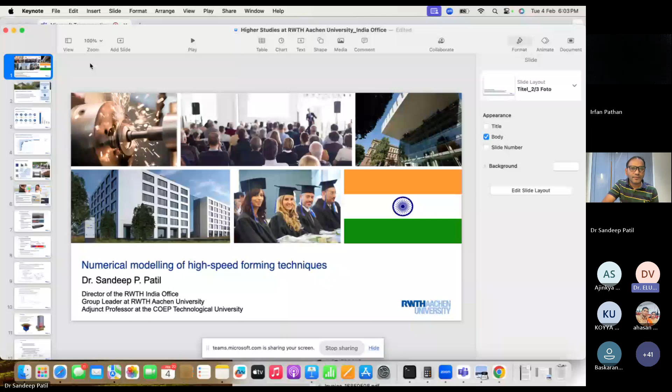First of all, thank you to Aditya University, with whom we already have collaboration, and we have been working together with student exchange and other possibilities, starting with student exchange to research activities and other planned activities between these two institutions. Before I go into the topic of numerical modeling of high-speed forming techniques, I would like to go into the details of the university first, talk about RWTH Aachen University, and then go into the main topic of today's session.

RWTH Aachen University, you must be knowing it, if you're in manufacturing and mechanical, then I think it's one of the best in the whole world. If you look at the QS Ranking 2025, the overall ranking of this university is 99, so it's in the top 100. However, if you look subject-wise, mechanical, aerospace, production and manufacturing, it's ranking 19th in the whole world according to the QS World Ranking 2025.

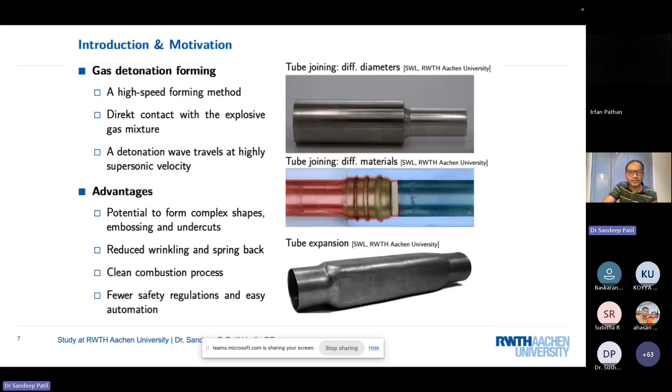So here you can see the ignition of H2 and O2 at one end. The ignition is happening at the left side of the tube, which is the ignition force created due to the ignition of H2 and O2.

Then afterwards, the detonation wave started because of the ignition, and this pressure wave propagation is happening. You can see the flame front, which is compressing the heated gas, and that's creating the pressure waves. So you can see in the right side picture how the pressure waves are created.

On that end, the right hand side end, there will be a sample, a blank, which you would like to deform into a different shape according to how you put the die at the end. There's one more thing, a reflected wave, which comes again from the reflection of the sample after the impact, and then it's getting reflected and hitting back. So this is what you will see with one pressure wave diagram.

So again, applications of this forming method can be into computer controlled detonation spraying process, tube joining, cup forming, pipe with a variable cross section, which you have seen already in the previous slide picture.

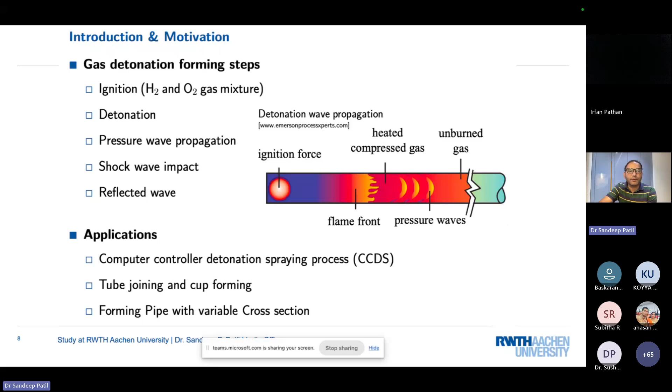Okay, so in Aachen, what we did was to have the experiment on one blank. Initially, we had this DC04 steel blank, and we put it into the grooves. So I'll just show you here.

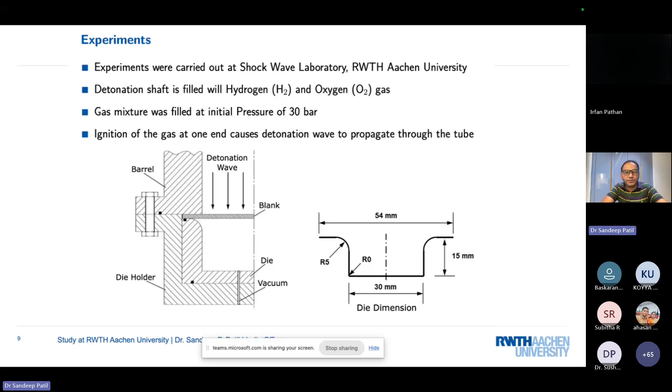So we just put it into the tube and the die. We put this blank into the groove, and then somewhere here there was a pressure created with the H2 and O2, and detonation happened, ignition happened. Then it created a lot of pressure.

Generally there is always a diaphragm, which is a cut section of the one standard blank. In order to have high pressure on the detonation side, once that pressure is created which can break the diaphragm, it means the diaphragm is providing the time to create that amount of pressure. Once that certain pressure is reached, it breaks the diaphragm, and the detonation wave travels and hits the blank. Then, depending upon the pressure you are applying, it takes shape.

For our experiment, we wanted to have a cup formation. So what we did was fill the gases of H2 and O2 with an initial pressure of 30 bar, and we ignite the gases at one end to create these detonation waves.

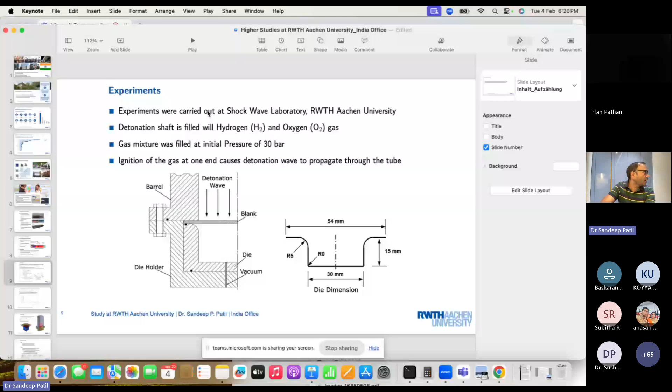Here, the pressure behind the detonation wave exceeds 20 times the initial pressure. If you look at the initial pressure, it's 30 bar, but the peak pressure of this experiment goes up to 150 bar. The measurements in this experiment were made with a piezoelectric sensor.

As I said, we avoid the negative pressure by using the vacuum tube, and sometimes we put a moist filter paper on the blank on the gas heating side, so that there is no overheating of the blank at the surface.

If you look at the pressure in a very short time, you can see the peak pressure of 150 bar, and then afterwards it goes back to the lower side. It's because of the reflection wave - again you get a little more pressure, then it goes down again, up and down. So this is the pressure wave we have observed.

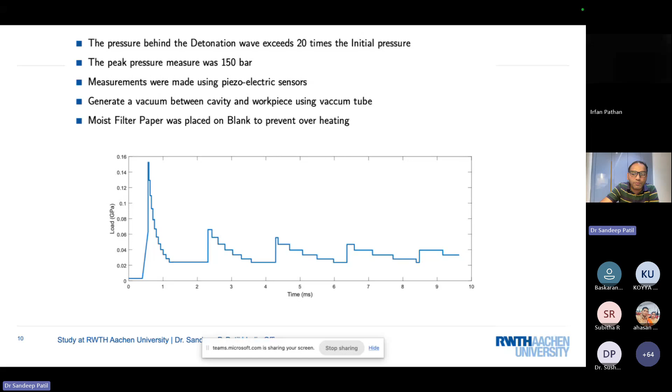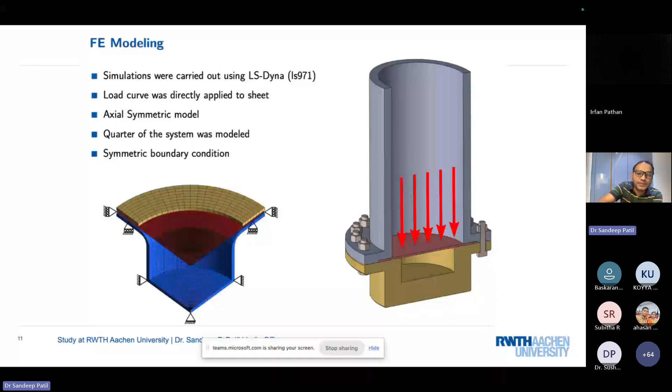If you look at the modeling, or finite element simulation, we used LS-DYNA and Hypermesh to create the model. In Hypermesh we created the model, and you can see here this is the model we created with CAD. We meshed it using Hypermesh, and we used different types of models.

We used one 2D model, which is just like one blank and the shape of the die. It's a 2D model, but it wasn't showing much due to lateral pressures and other things, and we wanted to also study damage. So we didn't consider that as the main model for the study. Instead, what we did was consider a quarter of the system, model it, and put axisymmetric boundary conditions.

So you can see here, this is the die, this is the die holder, and this is the sample blank, which is the red color. So when we applied the pressure on the portion which is open to the gas detonation, this is what we did.

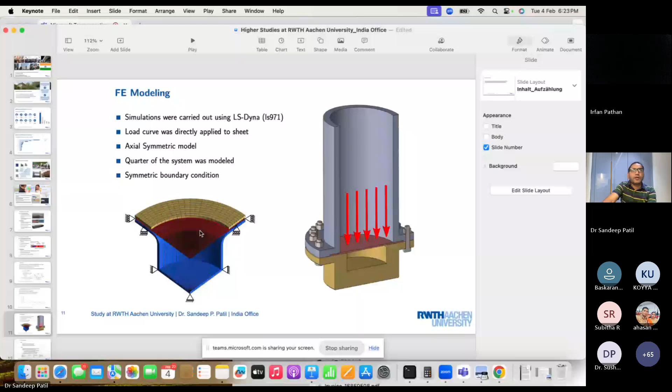It's very standard practice to use the die with solid rigid elements, called MAT20, because it's not the active part in the simulation. We don't want it to have any other material which adds calculation and too much simulation time. So we use rigid elements with high stiffness - it's not the active part, so we are not interested in the die, we just made it a solid rigid element.

The blank, which is our interest, uses Belytschko-Tsay shell element with 1 millimeter thickness. We tried other shell elements also, but as you can read in details, this Belytschko-Tsay element type is perfectly suitable for our high-speed method. Simulations were done using the material models MAT03, MAT24, Johnson Cook material model.

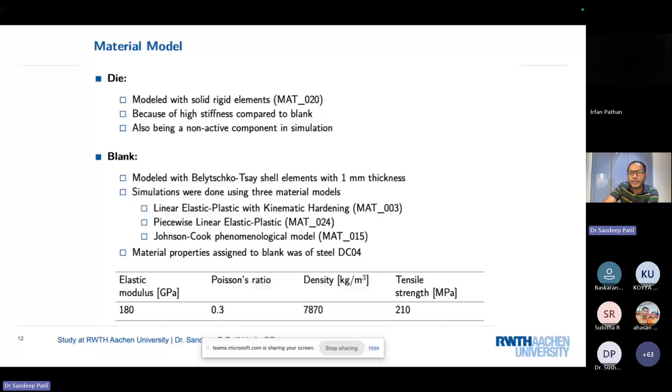So if you look at the kinematic hardening, which is a very simple model, I will explain in a minute. Material properties we assigned to the blank were steel DC04, and the DC04 mechanical properties—elastic modulus, Poisson ratio, density, and tensile strength—are tabulated in the table.

So the first one we used is kinematic hardening, which is very simple. A straight line going up, with kinematic piecewise linear elastic plastic behavior. Many of you must have used this, which always puts the stress strain curve into the software, and that's how it makes its behavior.

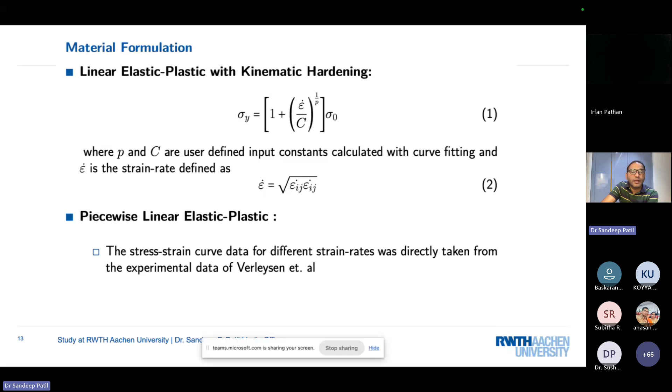Different strain rates were considered directly from the experimental data of Professor Verleysen from Belgium. She carried out many experiments with different strain rates, and we used that directly for our simulations. The last model we used was the Johnson Cook phenomenological model.

This is very interesting, so just not to go into too much detail, because I can explain how we get the parameters of the Johnson Cook model—and in our paper you can find this material model explained in more detail.

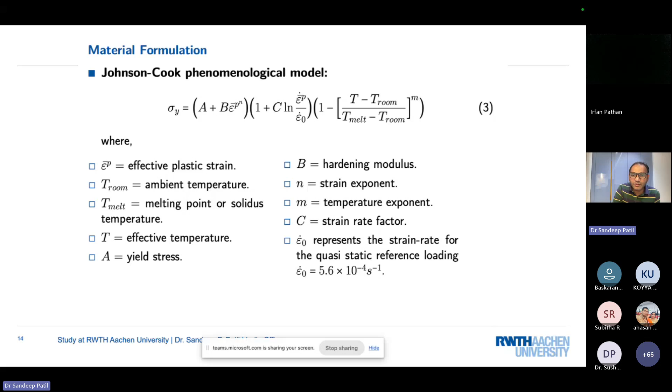So the parameters A, B, and N: A, B, and N are the yield stress, hardening modulus, and C is the strain rate factor, and N is the strain exponent. These parameters are determined using the static tensile strain test, so it's not rate dependent, but the other parameters like C and m are.

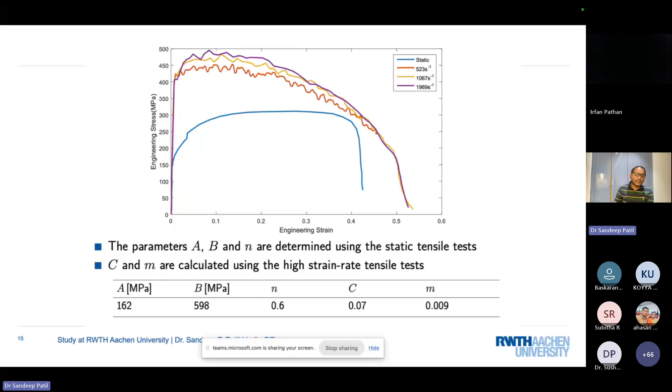If you look at the strain rate factor and the temperature exponent, if temperature plays a role, then it is calculated using the high strain rate tensile tests. So some of the parameters are calculated with the static strain, and some with the high strain rate. So what was the gap in the research?

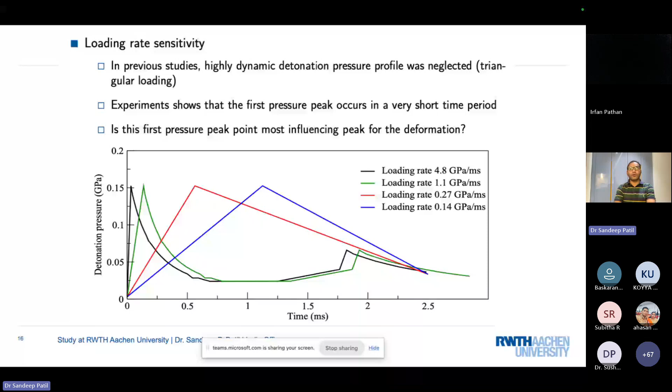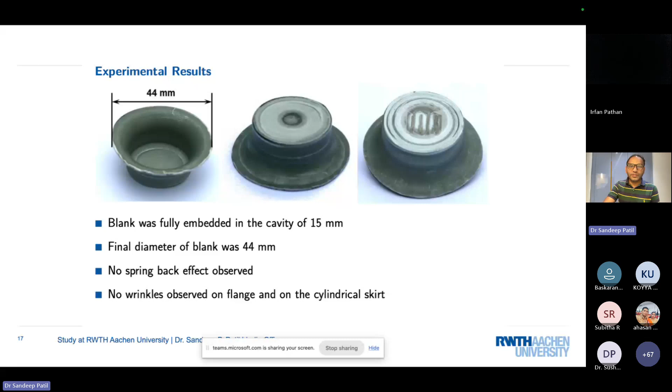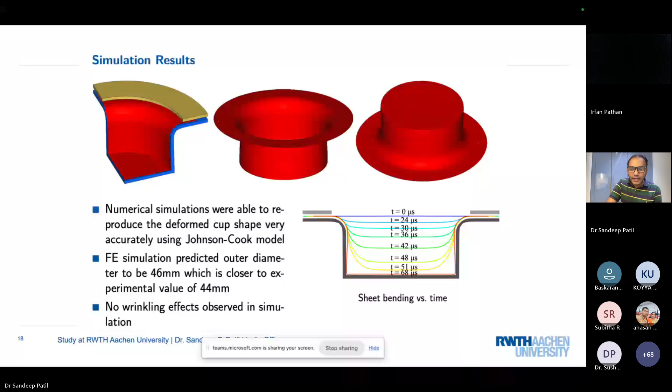Now with the simulation, we found that the outer diameter wasn't exactly 44 but was 46, which was pretty close. There were no wrinkles observed, and with respect to time, it was going nicely into the die, and at the end you can see it going sharply into the corners, making exactly the shape we observed experimentally.

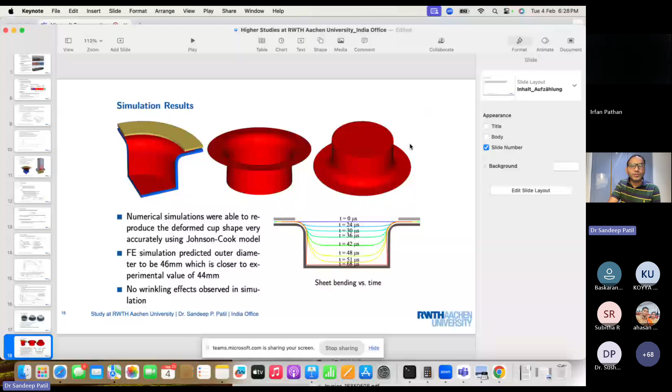So if you see here, exactly the sharp corners that we observe here in the simulation—so that was very interesting for us.

An important parameter we wanted to study, which many people have also studied, is the thickness distribution from the exterior edge to the center of the blank. What we did was cut down the deformed sample and started measuring the thicknesses, which we plotted as circles, representing the experiments.

Then we carried out the simulation and checked the simulated thickness distribution, and we found that the first impact, or the peak load, is making a lot of deformation. You can see the green and black curves almost matching the experimental data, especially the black one, which is pretty close to the experimental data.

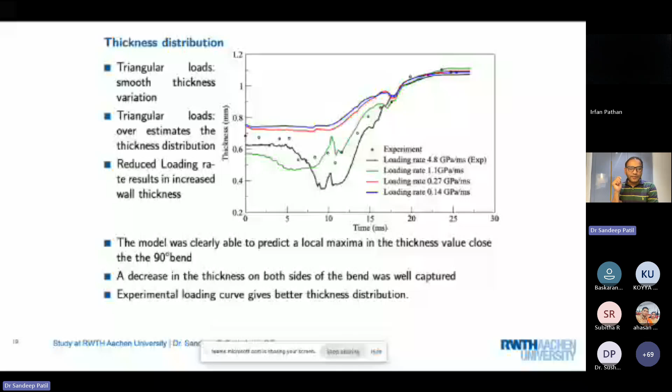And you can also see nice prediction of the thickness value at the 90-degree bend, as well as the decrease in thickness on both sides of the bend, which was well captured. There is also an increase in wall thickness, as you can see on the right hand side—this was interesting for us.

We also carried out tests at extreme pressure higher than 150 bar. We found that there was damage, and you can see it here. Interestingly, the damage happened and we could predict it at the sharp corners at the bottom. When we went to even higher extreme pressure, the blank at the bottom was almost like it flew away, which is also what we observed in the numerical simulation.

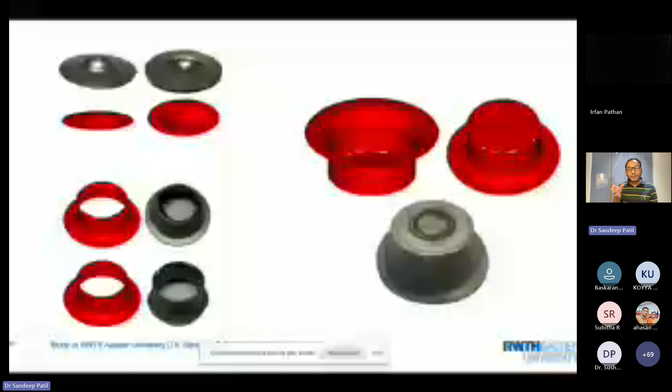We considered different stacks of plates of different materials, aluminum, copper, and steel, put them together, and made the detonation. We also considered different shapes and tube joining, and studied these with numerical simulation. We also used a rapid compression machine to carry out similar tests, and we published 3 to 4 articles which you can take a look at.

To summarize, numerical simulations were carried out with different material models to reproduce the experimental results as closely as possible. We used the Johnson Cook material model. Our finite element model can predict the cup shape of the blank, including the sharp edges at the bottom corner which I showed you, and the thickness distribution pattern exactly similar to the experiment.

We found the loading rate to be sensitive in our simulations. You can see nicely smooth results from the low loading rate, a triangular loading, but when you go to reality it is extremely fluctuated load.

We can see that accurate measurement of the loading rate is very important to get simulation results that closely match reality. We also studied different shapes and geometries using the FE model to give an idea, without experiments, of how it forms and what results it can give.

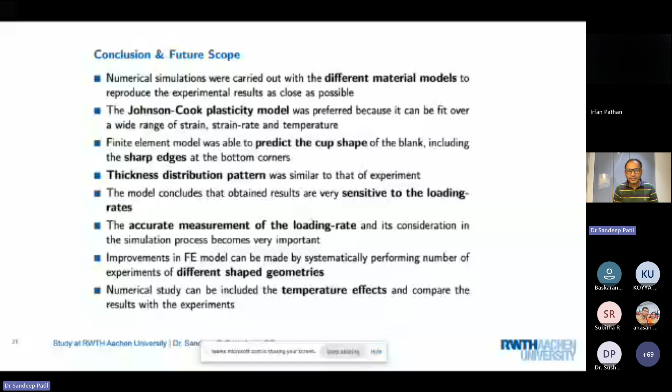Apart from this, I would like to show you a glimpse of our recent research. Generally at RWTH we do theoretical modeling as theory, then numerical simulation, and then experimental validation. So research has these three pillars, and then you get really good articles in high impact journals.

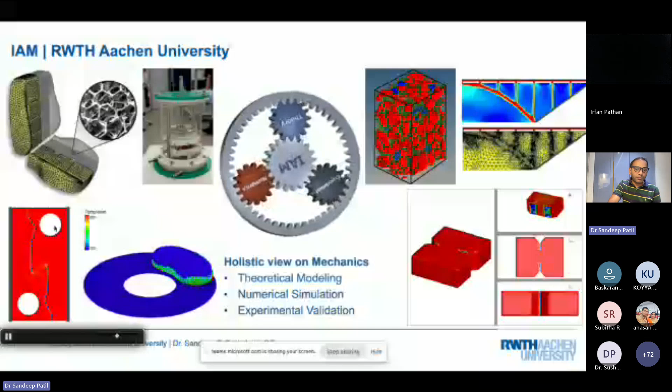We worked on sheet metal forming, the cushion seat with a coupling problem involving different fields together, crack propagation, brake pad, fracture, and bridge type problems with stress concentration points.

I would also like to show you my PhD research, which involves the biomaterial spider silk as an airbag fabric material, which can be a potential option.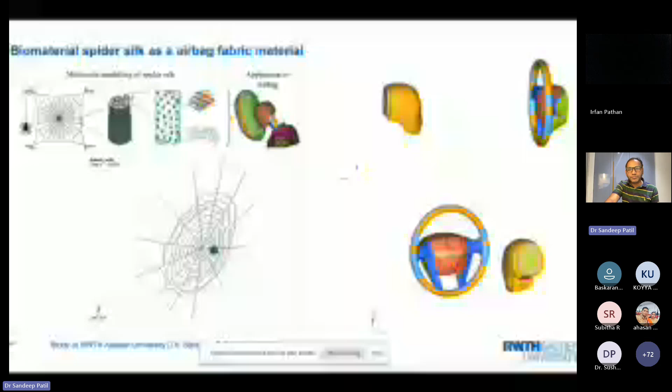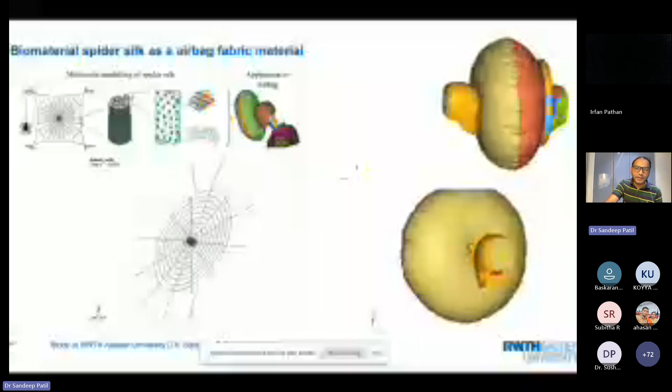Right now for airbags, people are using nylon 66, which is a highly elastic material. But if you introduce some dissipation into it, you can get a lower HIC, the head injury criteria index, and lower HIC is better. We found that spider silk could be a better airbag material, and we have been carrying out experiments at our textile institute.

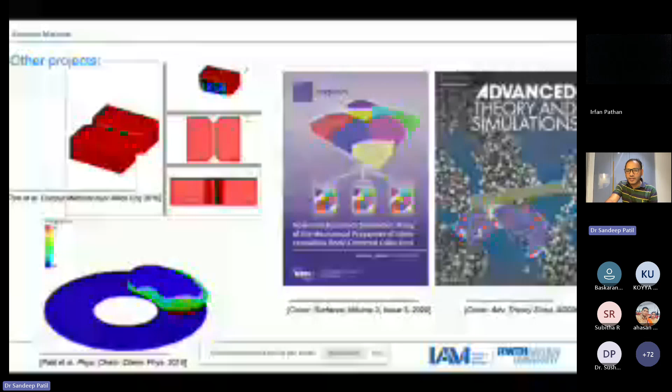Our research got noticed by many journals. Recently in 2020 we got 2 articles featured as cover stories on the cover page, which you can see here on the right side.

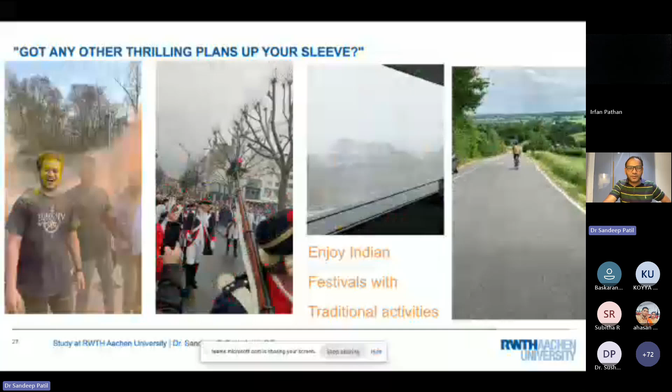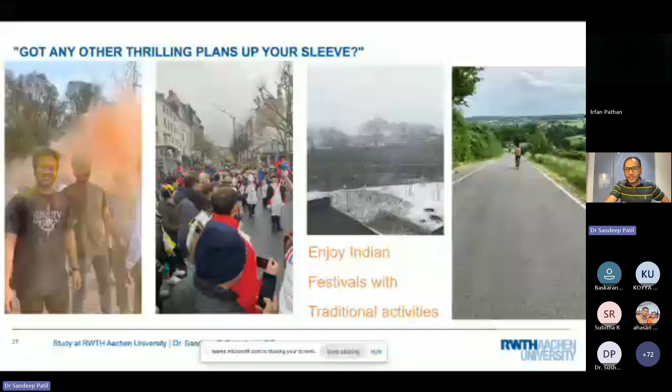We also celebrate many festivals, Indian or otherwise, and various seasonal celebrations, you can see cycling and winter activities here as well.

RWTH always welcomes people to study and also do research on campus.